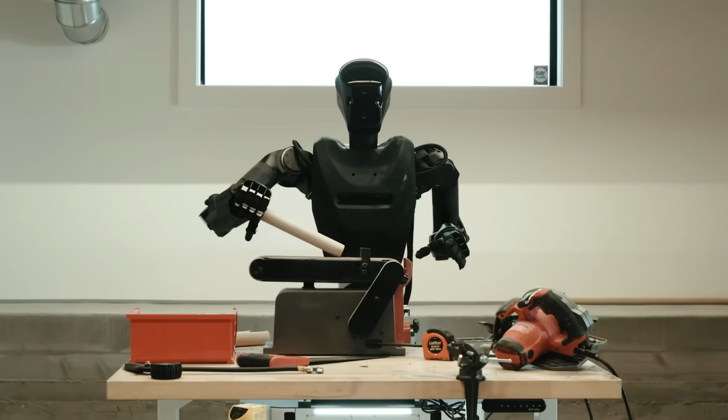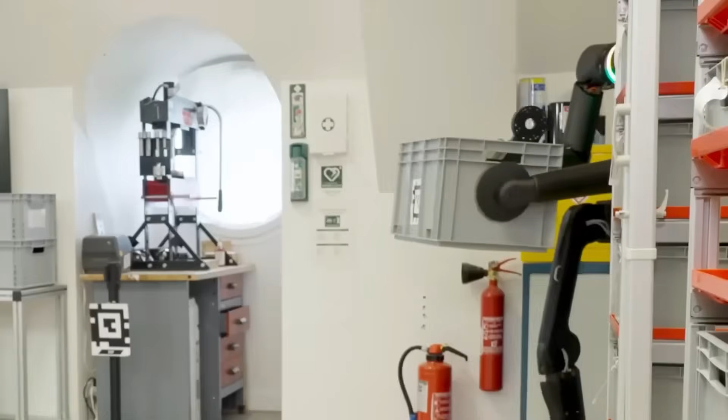Foundation Robotics is officially going full humanoid. Wheeled robots are out, and legged robots are the entire future. And if that wasn't enough to shake up the robotics world, Wandercraft just locked in $75 million to go absolutely massive with their AI-powered exoskeletons and humanoid robots.

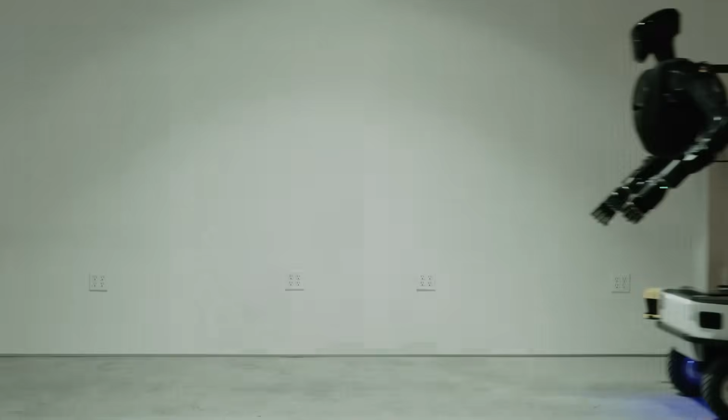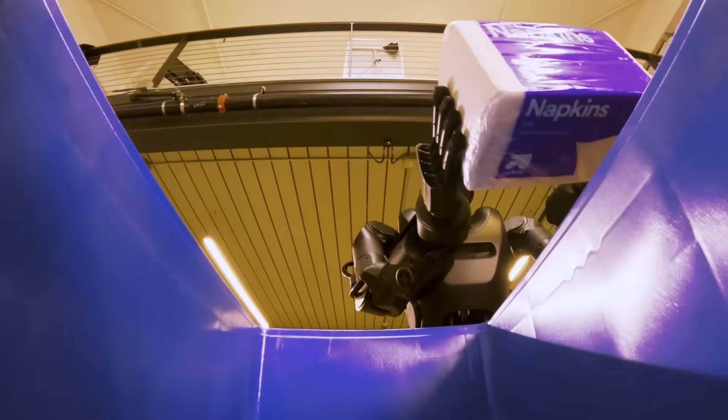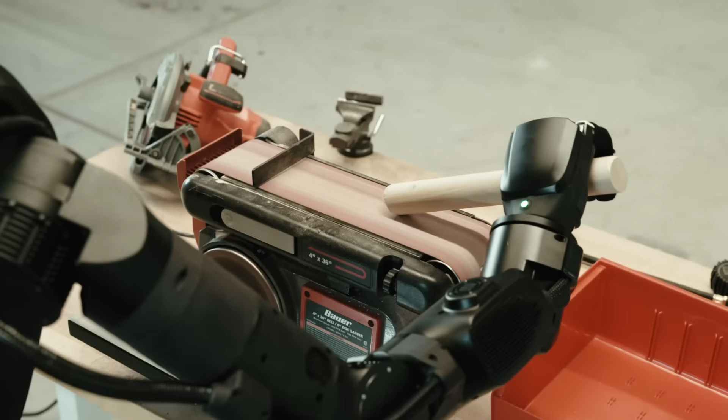Let's start with Foundation Robotics, because their pivot is one of the most decisive moves we've seen from any robotics company in the last year. Just a month ago, they shipped out their very first production robot, the Phantom, to a real customer. That robot had wheels, was built for real-world factory work, and marked the company's first step into commercial deployment. But now, Foundation just dropped new footage showing Phantom operating in that customer's facility, and in the same breath, they made it clear: they're done with wheels.

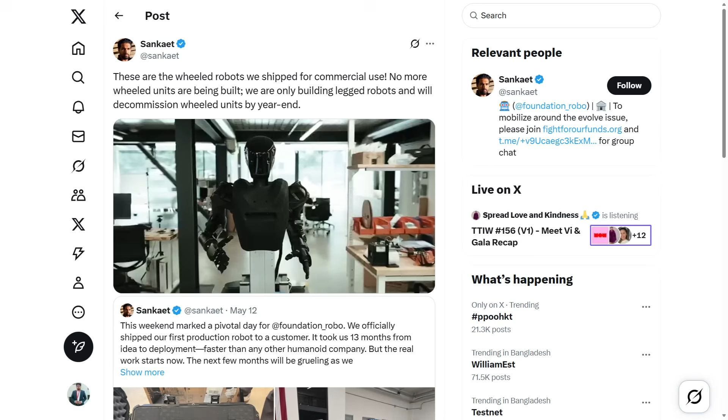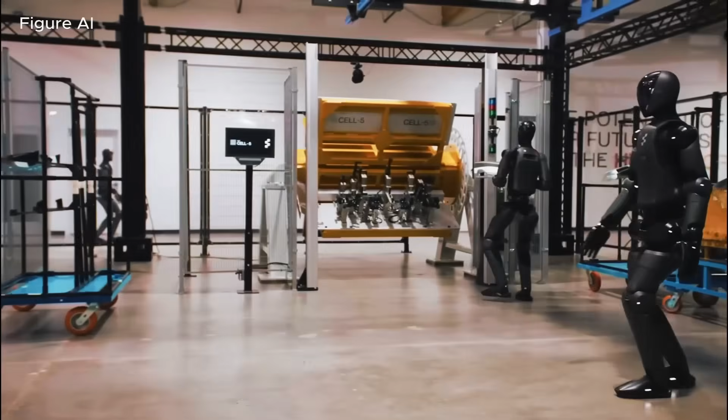Foundation is officially ending production of their wheeled robots and will phase them out entirely by the end of the year. That's a bold statement, because a robot company finally gets a product to market, lands their first customer, and instead of doubling down, they pull a 180. Why? Because they believe the future isn't wheeled, it's legged, it's humanoid. Bipedal machines that can navigate the same spaces we do without needing ramps, flat surfaces, or any special accommodations. Now, Foundation isn't exactly abandoning what they've built so far.

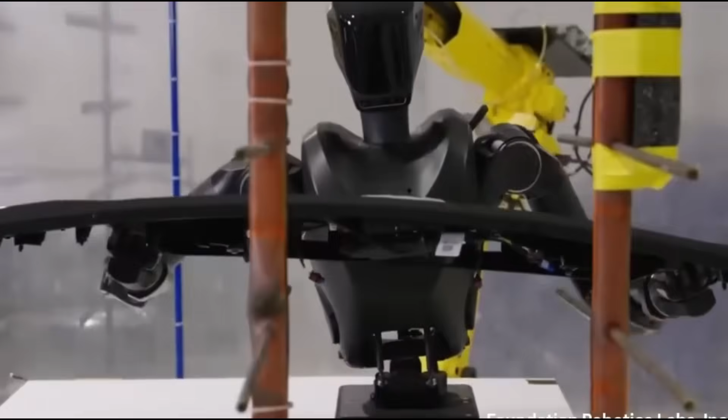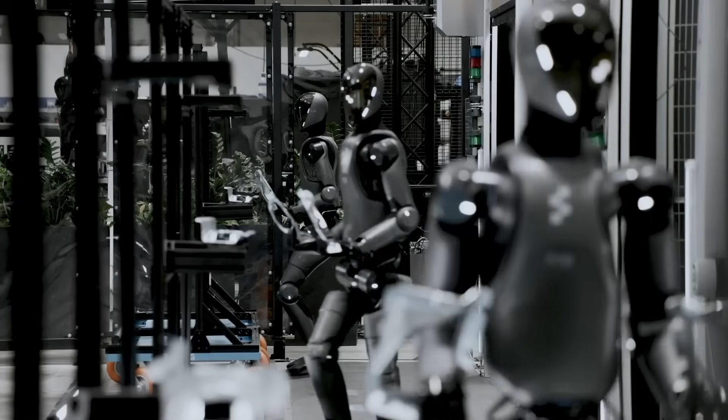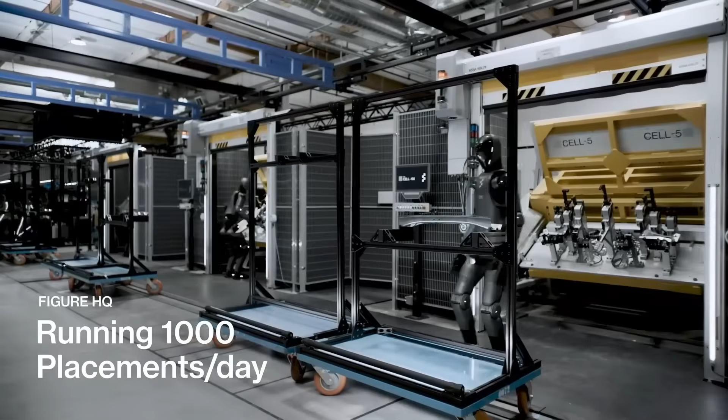That customer deployment was still a huge success. The Phantom showed real capability. But Foundation is looking at the bigger picture. They know that to build robots that can work in truly human environments, in warehouses, factories, homes, or offices, you need legs. You need humanoid systems that can handle stairs, thresholds, tight corridors, and unexpected clutter. You need machines that walk like us, see like us, and move with enough fluidity to be genuinely useful alongside people. And that's where their new focus lies.

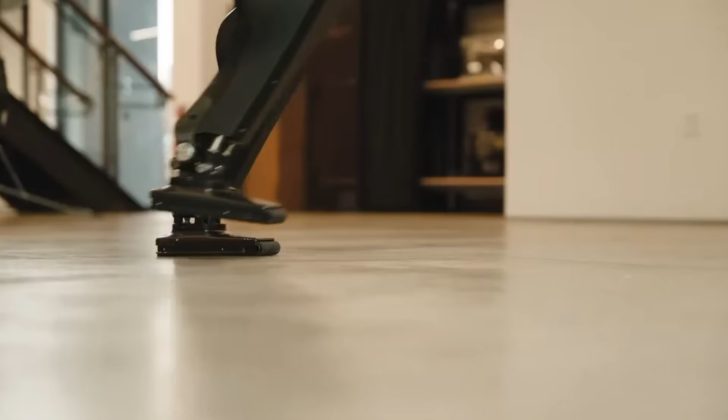This shift isn't coming out of nowhere. Foundation Robotics has been working behind the scenes on legged mobility for some time. They've hinted at prototypes, internal testing, and design overhauls. But this is the first time they've put a clear stake in the ground: wheeled units phased out, entire focus on legged humanoid robots.

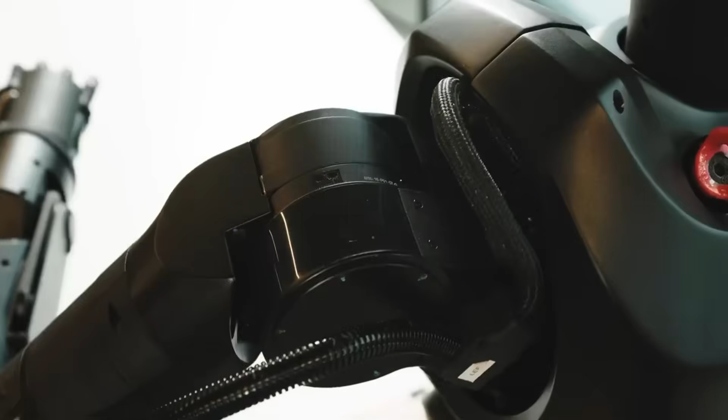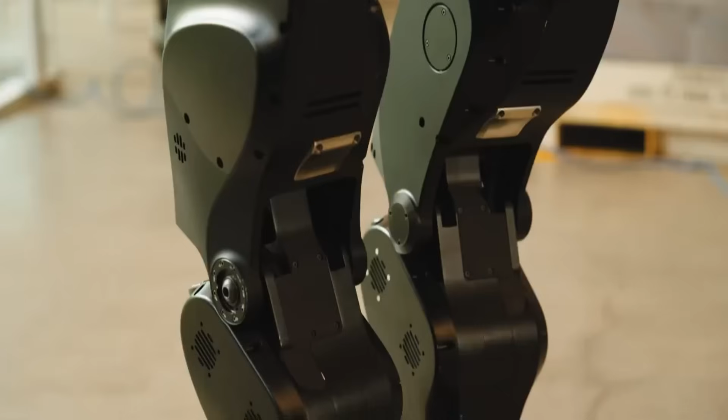That puts Foundation squarely in the race with some of the biggest names in robotics today: Figure, Tesla, Agility, 1X, Apptronik. But what makes Foundation's move unique is that they're not just talking, they're executing in real time. One month, production robot shipped. One month later, full strategic pivot, footage of robots in action, and a total commitment to the humanoid vision. It's a sign of how fast this industry is moving, and how quickly companies have to adapt if they want to stay relevant.

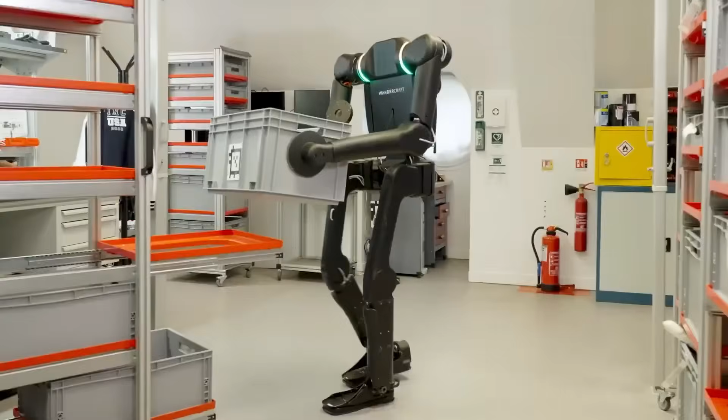Now, pivot over to Wandercraft, and the story gets even bigger. If you've been following the robotics space, you've probably heard their name before. They're the Paris-based company known for building some of the most advanced robotic exoskeletons in the world, machines designed not just to assist movement, but to restore it entirely for people with mobility impairments.

And they just raised a whopping $75 million in Series D funding. Let that number sink in. $75 million, that's not seed money, that's not an experimental grant. That's serious capital from major backers, including Renault Group, Bpifrance, and the European Investment Bank. These aren't just tech dreamers, these are industrial, economic, and governmental powerhouses placing big bets on Wandercraft's vision.

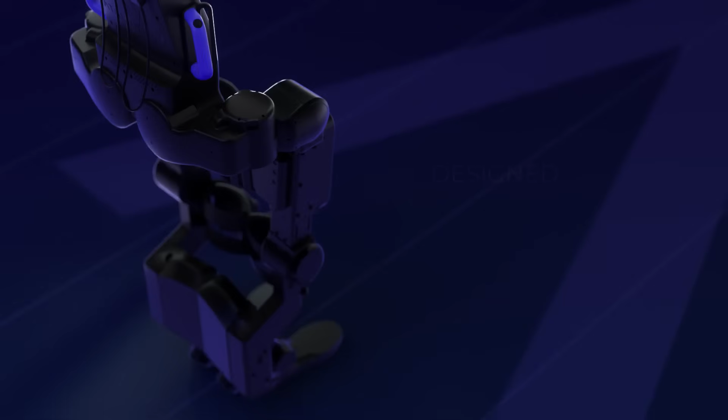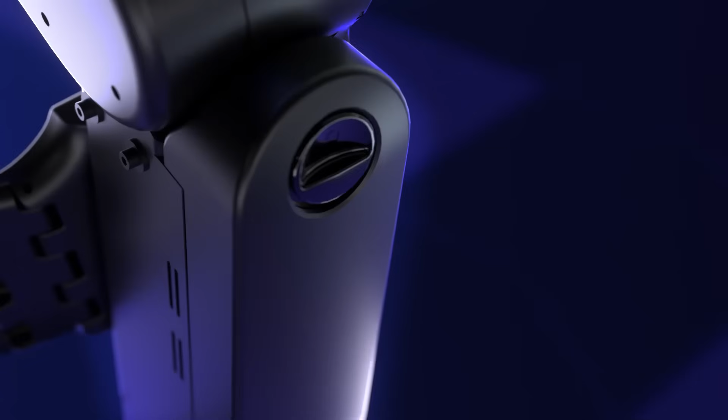So, what's the money for? First up, Wandercraft is launching something that could totally redefine assistive robotics: a personal-use, self-balancing exoskeleton called Eve. That name's not random, it's the first of its kind. Until now, most exoskeletons required crutches or support. But Eve? It balances itself, it walks on its own, and it's built for real people to use in real life, outside of hospitals and labs.

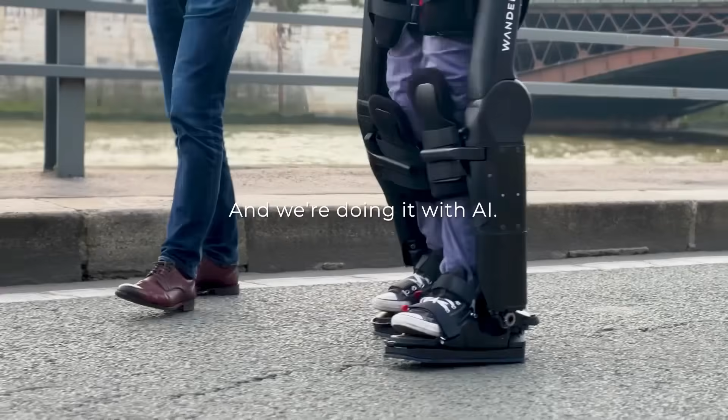They're aiming to launch it by 2026, and when they do, it could change everything for people with spinal cord injuries, neuromuscular disorders, or stroke-related mobility loss. This isn't just a medical device, it's a wearable robot that gives people their independence back. And Eve is just the beginning. Wandercraft is also pushing to expand clinical use of their existing Atalante X platform, a robotic walking system that's already being used in rehabilitation centers across Europe and the US. This device doesn't just assist movement.

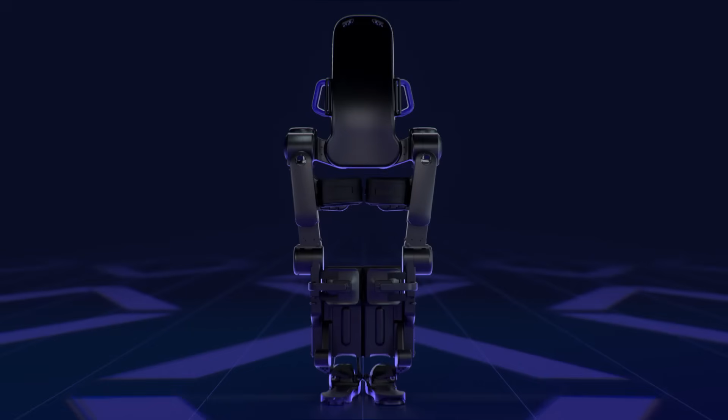It trains the user, simulates natural gait patterns, and offers real-time feedback. It's powered by AI, deeply customizable, and now, thanks to this funding, it's poised to scale like never before.

But here's where it gets even more exciting. With all the attention on exoskeletons, Wandercraft is now also stepping directly into the humanoid robot arena. They're developing a fully autonomous humanoid robot called the Calvin 40. And this isn't some distant concept or pie-in-the-sky vision. It's already in the works.

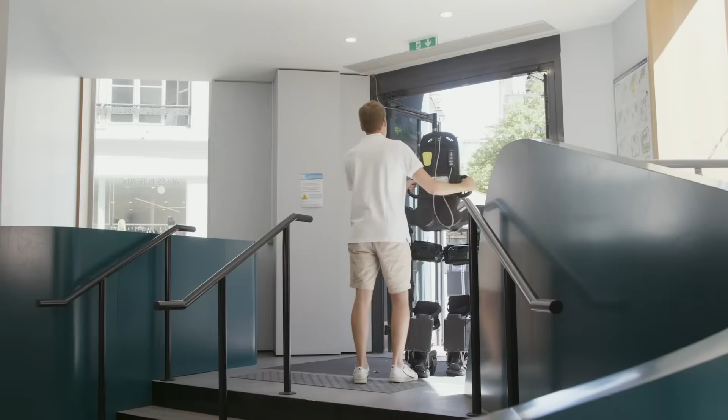Calvin 40 is designed with Wandercraft's deep biomechanical expertise baked in. Their exoskeletons already simulate human walking with uncanny precision. Now they're taking that same tech and applying it to a fully robotic system that can walk, balance, and eventually perform useful tasks in human spaces.

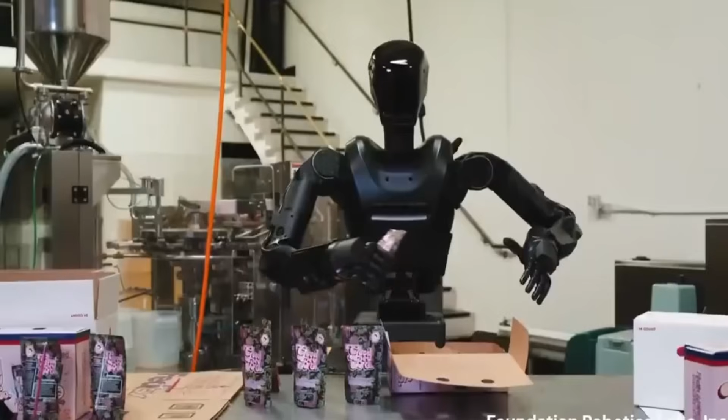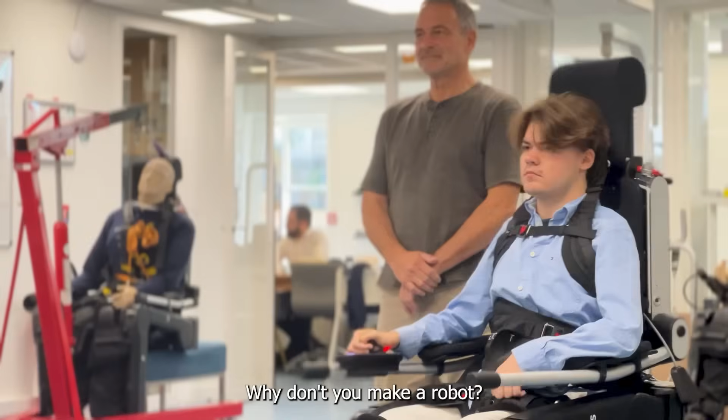So on one side, you've got Foundation Robotics going full humanoid and ending wheeled robot production entirely. On the other, Wandercraft is not only building life-changing exoskeletons, but stepping into humanoids with a war chest of fresh funding and institutional backing. And when you look at both companies side by side, a bigger picture starts to emerge. This is the era of convergence.

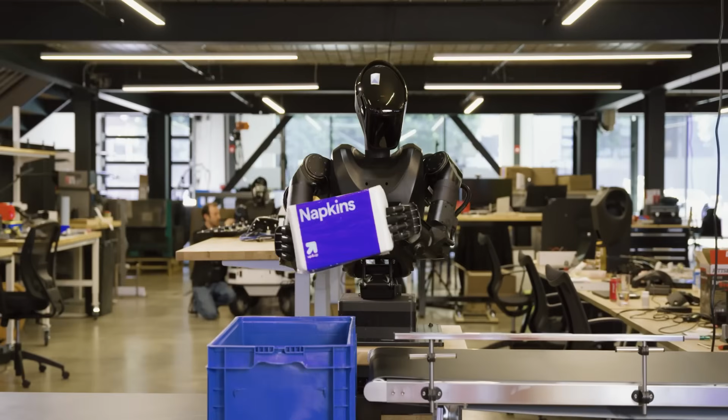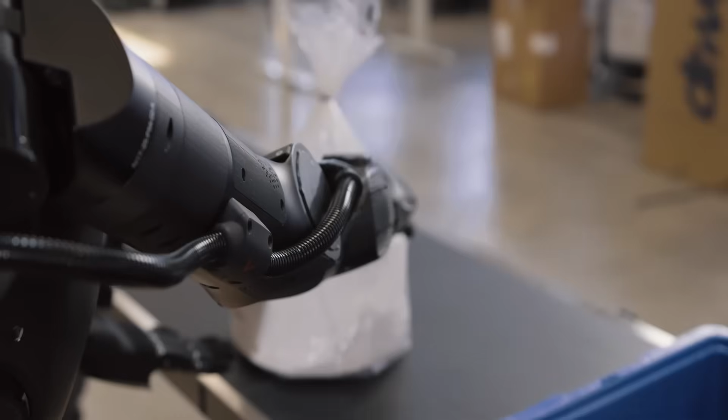We're seeing the lines blur between assistive robotics, industrial automation, and general-purpose humanoids. It's not just about robots doing factory work anymore. It's about embodied intelligence, AI systems that can move through the world the way humans do, with balance, adaptability, and awareness. Foundation and Wandercraft represent two ends of that spectrum.

One started in industrial applications and is moving toward general-purpose humanoids. The other started in assistive tech and is evolving into full-bodied robotic systems. And they're both powered by the same fundamental shift: AI.

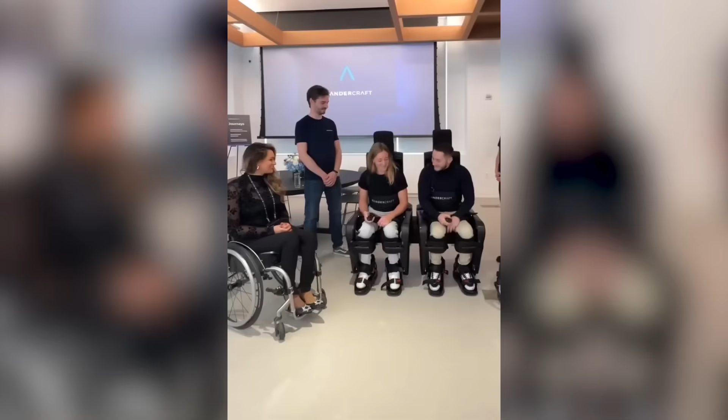Think about how foundational this is. Foundation Robotics is ditching rule-based robotics in favor of AI-native systems. Wandercraft is training intelligent gait engines using real-world movement data. Both companies are leveraging machine learning not just to guide robots, but to define their behaviors from the ground up.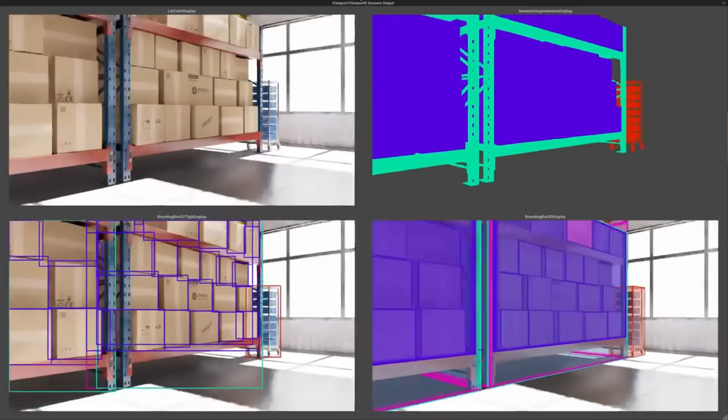This isn't about pre-programming a robot with specific motions. It's about giving it the tools to learn from the environment, adjust in real time, and execute complex behaviors fluidly. That's the leap. That's what makes these robots different from the clunky machines of the past.

Let's put this into context. For years, robots have been confined to highly structured environments: assembly lines, controlled labs, repetitive tasks. Why? Because they couldn't deal with change.

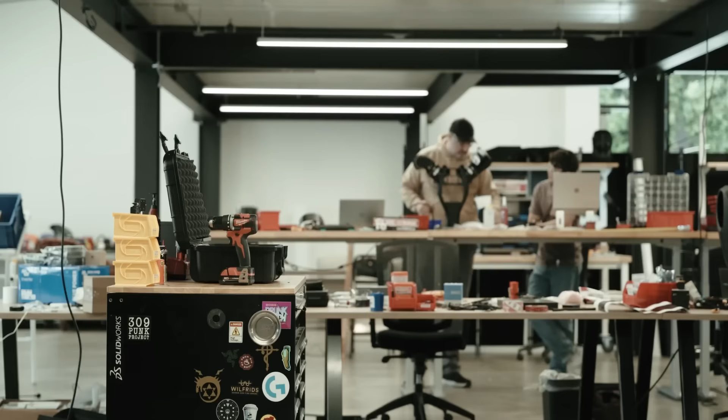But humans don't live in structured environments. We deal with uncertainty, imbalance, complexity. That's why humanoid robots have always seemed like science fiction. They require an entirely different level of perception, control, and intelligence.

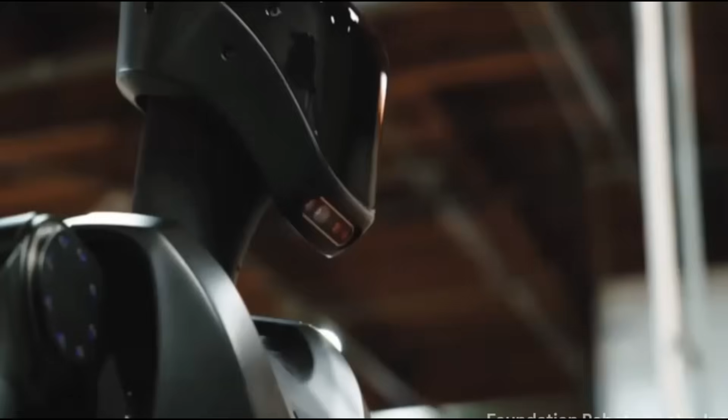But now, companies like Foundation and Wandercraft are cracking that code. And it's not just about walking. It's about integrating vision, planning, and motion into a seamless feedback loop. It's about learning from experience. It's about adapting on the fly. These are capabilities that used to be the domain of animals, and now, increasingly, they're being embedded into machines.

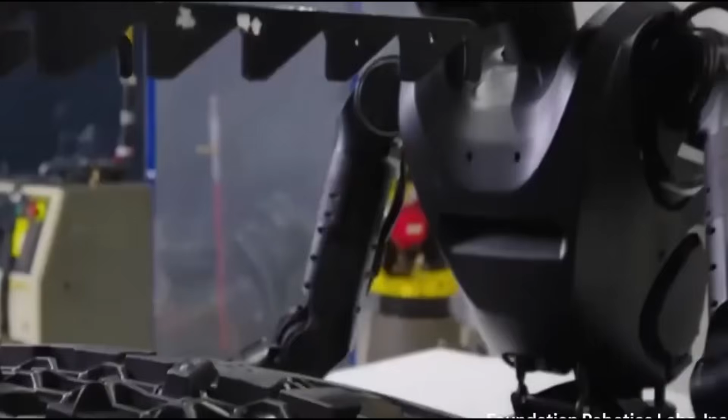Now, here's the thing. This shift isn't just technical, it's strategic. Both companies are positioning themselves for the long game. Foundation is making a clean break from legacy systems to focus entirely on future-ready designs. Wandercraft is building a product pipeline that serves clinical, personal, and industrial markets simultaneously.

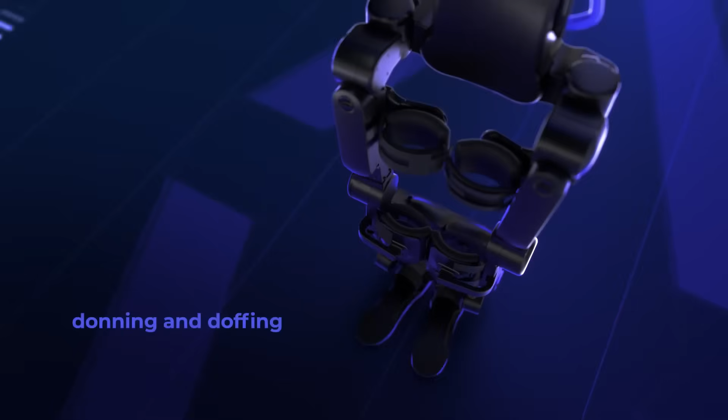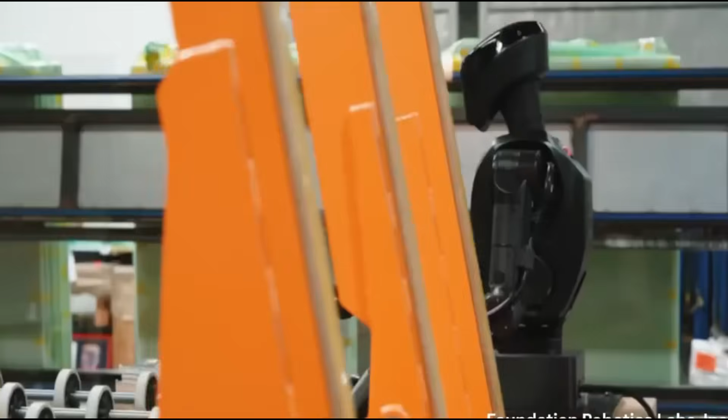And because they're building intelligent, software-defined robots, they can iterate fast. They can deploy updates, refine behaviors, and scale their platforms in ways that weren't possible before. That agility is going to be critical as demand for real-world robotics continues to explode.

We're not just talking about helping people walk again or replacing warehouse workers. We're talking about a complete rethinking of how physical labor, mobility, and embodied intelligence are handled in society. And here's what makes it even more compelling. The economics are finally lining up.

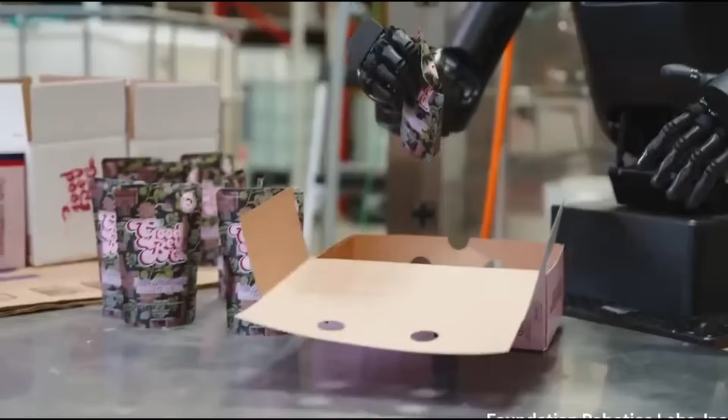For years, humanoid robots were dismissed as too expensive, too unreliable, or too gimmicky. But now, with breakthroughs in AI, better hardware, and smarter designs, the cost curves are bending. Just like smartphones, drones, and electric vehicles, the tech is reaching an inflection point. One where scale becomes not only possible, but inevitable.

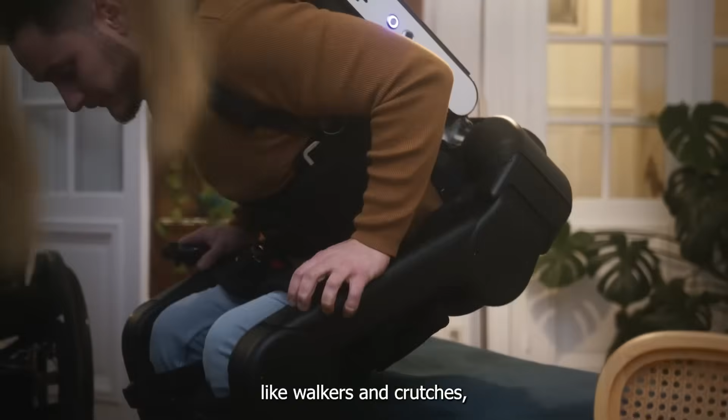Companies like Figure have already talked about driving costs down 90%. Now Wandercraft is building high-impact devices that could be affordable for hospitals and individuals. And Foundation's Pivot signals they're ready to compete on both performance and price. We're at the beginning of a robotics arms race. But this time, it's about who can make the most useful, scalable, intelligent, and human-ready machines.

So what happens next? If you're a robotics company right now, you have two choices: either adapt to the humanoid revolution or get left behind. The bar has been raised. AI-native design isn't optional. Legged mobility isn't niche. These are becoming table stakes for anyone who wants to play in the future of embodied AI.

If you're a developer, researcher, or engineer, now is the moment to get involved. This isn't a future arriving slowly, it's accelerating, with real funding, real deployment, and real-world results happening right now. Foundation and Wandercraft aren't just participating in that acceleration, they're helping to lead it. Keep your eyes on these companies and watch how quickly they move, because if the past few months are any indication, the next wave of updates could completely change the game again. AI robots aren't just evolving, they're transforming fast, and if you're wondering where the next leap is coming from, you're probably already looking at it.

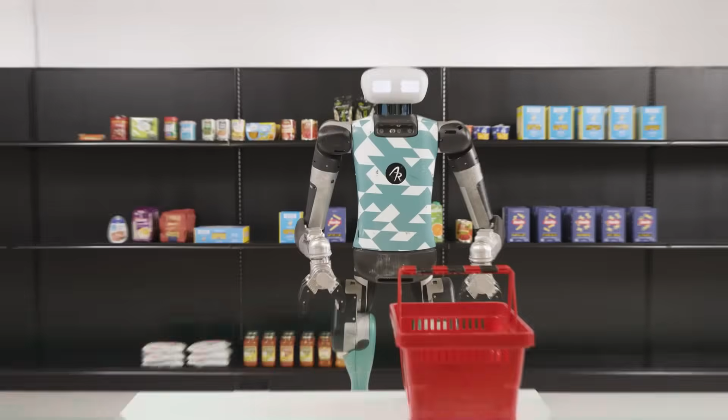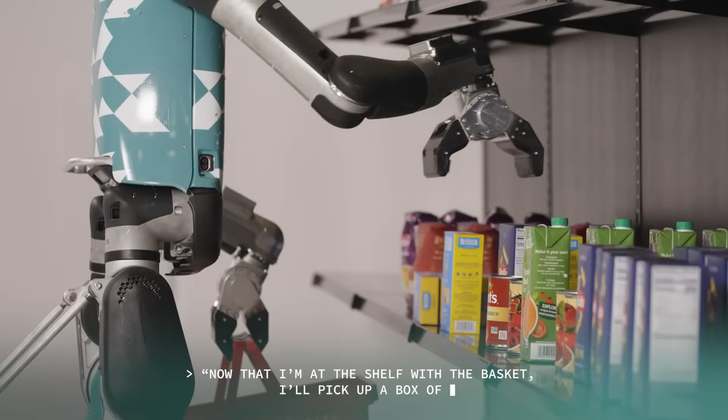If you think that was impressive, buckle up, because what Digit from Agility Robotics pulled off might just redefine what we expect from humanoids. Their humanoid robot, Digit, didn't just walk or carry something around. It listened to a natural language request, figured out what it meant, decided which ingredients were needed, searched the environment, and collected the items all on its own. This wasn't a controlled lab test. It was a real-world scenario that required understanding, reasoning, navigation, and physical manipulation, the kind of things humans do effortlessly and robots have struggled with for decades, until now.

Seven words, that's all it took. A person said, 'Bring me the ingredients to make pasta,' and the robot moved. No buttons pressed, no joystick, no technician in the back. Just a human voice and a humanoid machine that understood exactly what to do. So let's unpack this, because what just happened isn't just a quirky robot trick. It's a glimpse into the near future of service robotics, a future where robots don't just follow instructions, they understand them.

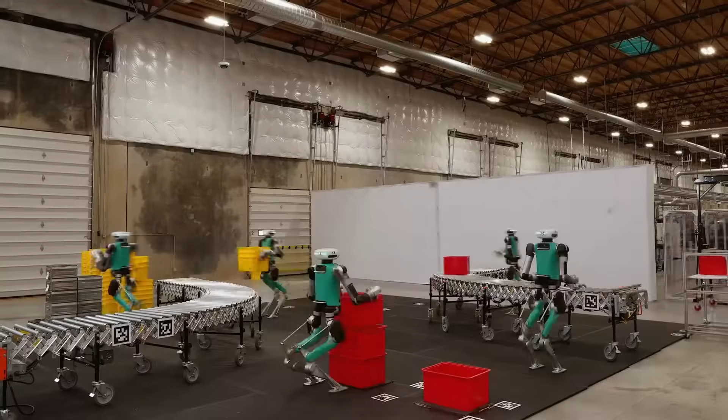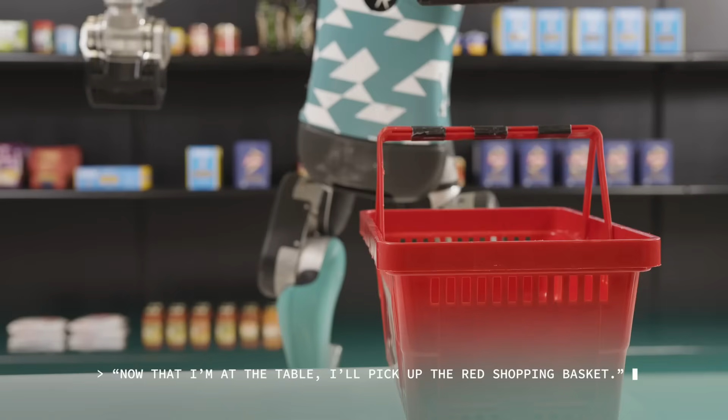First, let's talk about the robot itself. Digit has already made headlines in recent years for its elegant, bird-like walking gait, its role in logistics at Amazon, and its impressive balancing and recovery capabilities. But this new demonstration takes things to an entirely new level. This wasn't about stacking shelves or walking in circles, this was about context. When Digit heard, 'Bring me the ingredients to make pasta,' it had to understand what that meant.

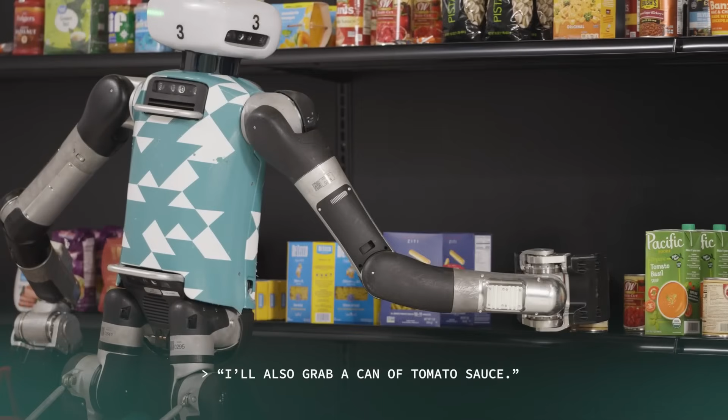And that's not as simple as it sounds. Unlike a traditional robot arm on an assembly line, Digit wasn't given a checklist. It had to interpret the goal, making pasta, and figure out what that entails. Think about what goes into that. First, Digit had to determine what ingredients are typically used to make pasta. Does that include dry pasta, sauce, garlic, olive oil, maybe some vegetables or cheese? That requires a knowledge base, a combination of pre-trained data, logical reasoning, and possibly even preference weighting based on the environment it's in. Digit had to identify what the request actually meant before it even moved a single step.

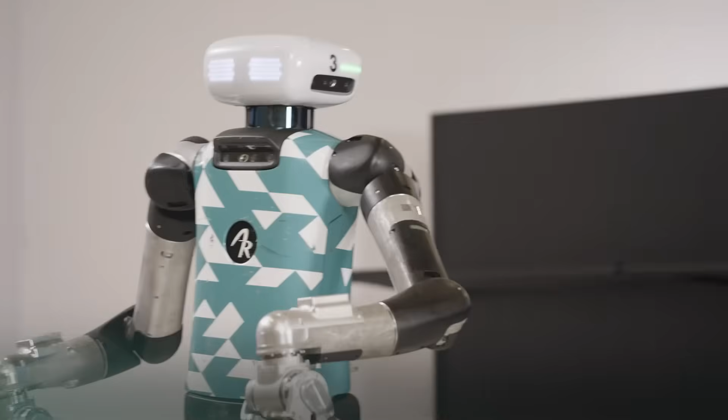Then came the hard part: execution. Once the robot understood the items it needed, it had to search for them. That means scanning its environment, identifying objects using computer vision, differentiating between similar items, and handling occlusion, meaning if something's partially hidden or facing the wrong way, Digit still had to figure it out. That's something that has traditionally tripped up even the best robots in the lab.

And it wasn't operating in a sterile, fixed environment. This was not a demo in a lab with neatly placed markers or labeled items. It was a naturalistic setting. Just like you or I might navigate a kitchen or grocery aisle, Digit had to make decisions in real time. Do I go left or right? Is that spaghetti or fettuccine? Can I carry this item while also grabbing the sauce?

It even had to coordinate its physical body. Digit doesn't have hands like a human, it has uniquely designed arms with simplified grippers, optimized for stability and utility, not delicate manipulation. So every item it picked up required some decision-making on how to grasp, lift, and balance it while continuing to walk. And keep in mind, Digit walks bipedally, that means balance and locomotion are already complex on their own, even without carrying things.

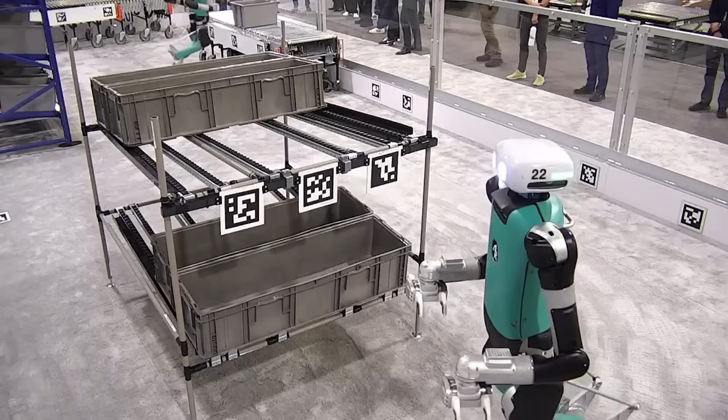Now here's where it gets even more interesting. This wasn't a single hard-coded routine, the entire point of the demonstration was to show generalization. Digit wasn't told exactly which items to grab or where to go, it used onboard intelligence and perception to decide. And the language command it received wasn't robotic either, it was natural language, just like someone might ask a roommate or an assistant. That's a massive leap in how humans and robots can interact. Up until recently, if you wanted a robot to do anything, you had to be specific, you'd have to program exact coordinates, define the object parameters, create a rigid script. But now we're seeing a turning point.

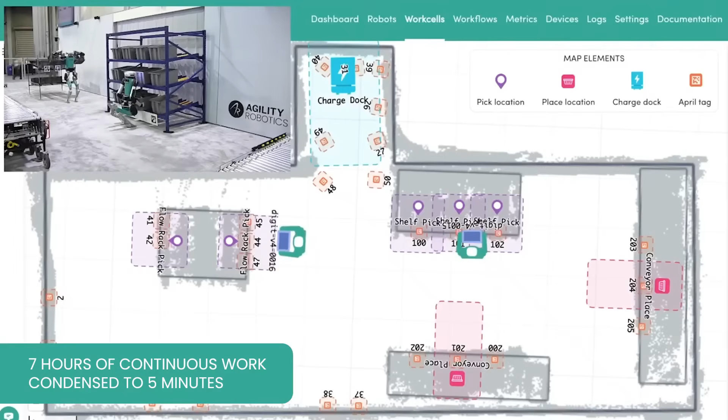Robots like Digit are being trained to understand intent, not just instructions. They're beginning to reason, to plan, to decide. This kind of capability is made possible by the fusion of physical robotics with advanced AI models. Natural language processing, scene understanding, motion planning, and visual recognition all have to work together in real time. It's like giving a robot a brain, a nervous system, and a pair of legs, all controlled by something that's learning to think.

That's why this moment matters. It's not just that Digit did something cool. It's that the task it performed required dozens of different skills to come together in harmony. It had to listen, reason, move, manipulate, adapt, and respond, all in response to a very human request. That's not a stunt. That's intelligence.

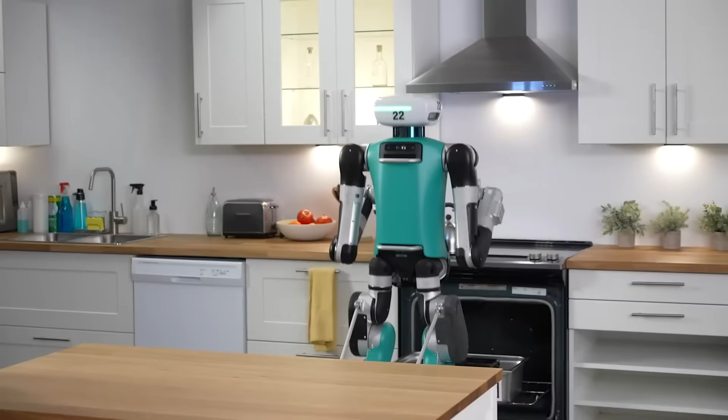Now, let's think bigger. If a robot can take a vague request like, "Bring me the ingredients for pasta," and turn it into a series of successful physical actions, then we're looking at a future where robots can be genuinely helpful. Not just in factories, but in homes, stores, restaurants, hospitals, and public spaces.

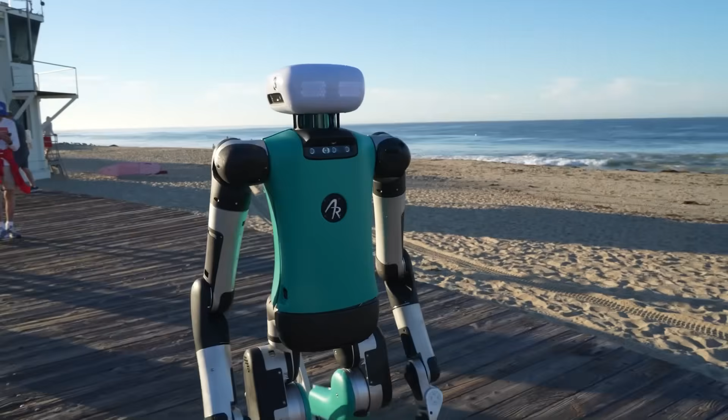Picture a world where humanoid robots assist elderly individuals in their homes. They don't need to be told every detail. You could say, "I want to make a salad," and the robot would fetch the ingredients from the fridge. Or in a retail setting, you could tell the robot, "Help this customer find a red jacket," and it would understand not just the words, but the intent, guiding, assisting, even engaging in conversation if needed.

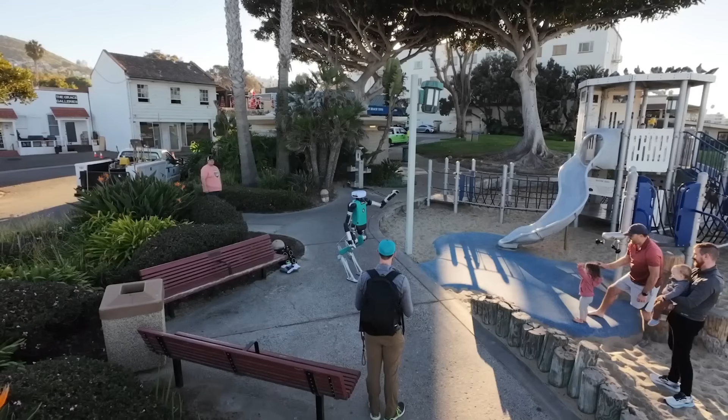Agility Robotics is clearly thinking in this direction. Their design philosophy for Digit has always emphasized human-centric environments. In other words, they're not trying to redesign the world for robots. They're designing robots that can navigate our world the way it already is. That's a huge shift from the traditional robotics model where environments are tightly controlled.

By equipping Digit with natural language capabilities and autonomous navigation, they're showing what's possible when machines begin to understand human goals in the way we naturally express them. That's what sets this demonstration apart.

There's also something psychologically powerful about it. Watching a humanoid robot respond to your voice, turn its head, walk across the room, and return with something you asked for, it taps into something primal. It's the same feeling that science fiction has teased for decades. The dream of a mechanical assistant that understands you. Not just follows commands, but understands you.

And yet, this isn't a far-off dream anymore. It's not just being imagined in books or movies. It's happening, right now, today.

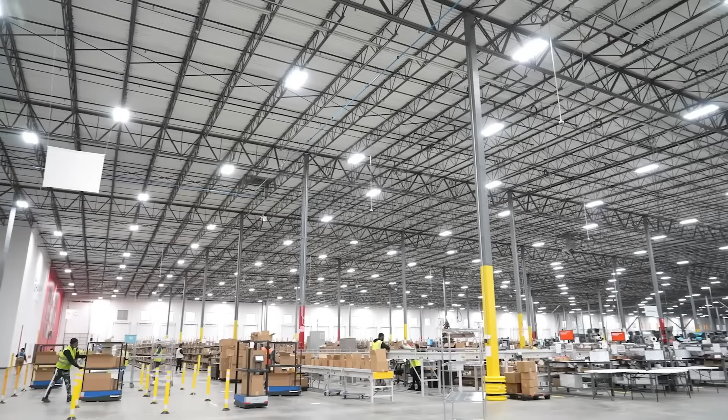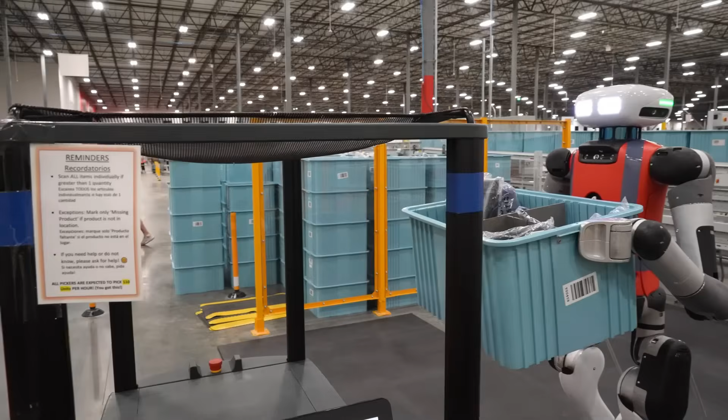But let's be real for a moment. There are still limitations. Digit isn't as fast as a human. It's not going to win a race against a warehouse worker. Its hands are still relatively basic. It's not going to julienne carrots or open a jar of sauce anytime soon. But none of that takes away from what it can do. Because autonomy, real autonomy, is harder than anyone outside the field realizes. And what we just saw was a working example of it.

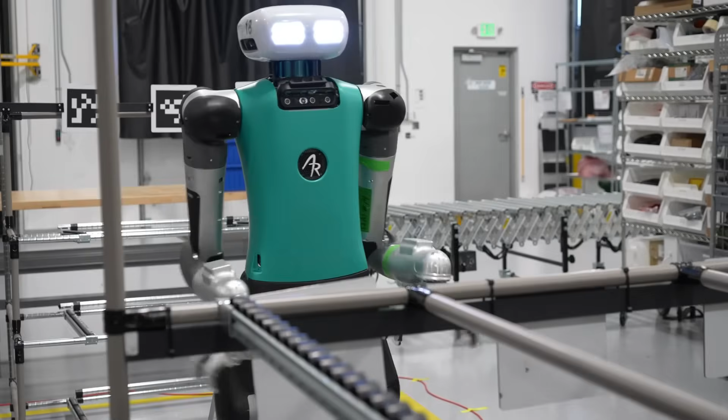The next logical step is scale. Right now, this kind of demo is still carefully staged, even if it's real world. But imagine what happens when these capabilities get rolled out to multiple robots in multiple locations, performing various tasks for real customers. That's where things get exponential.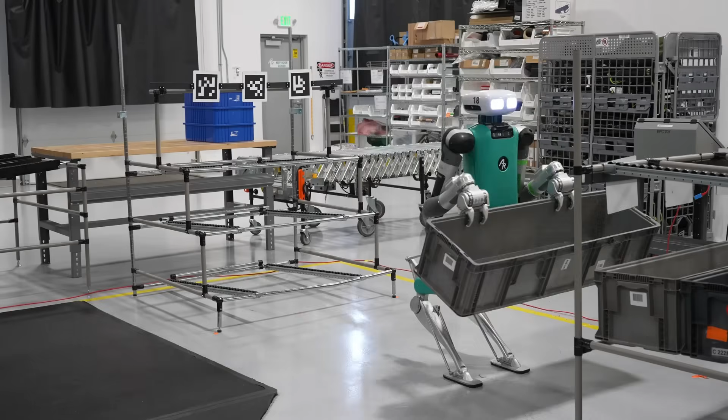Agility Robotics already has plans to deploy Digit at scale, especially in logistics and retail. But this kind of demo opens up entirely new categories: smart kitchens, home robotics, elder care, customer service. The technology behind this could be licensed, adapted, and expanded in ways we haven't even imagined yet.

There's also the matter of safety, and Digit's design addresses that head-on. Unlike some industrial bots, Digit is lightweight, has a soft exterior, and is meant to coexist with people. Its movements are deliberate and non-threatening. It's not there to replace human interaction. It's there to enhance it.

And here's something else worth considering. If a humanoid robot can understand language, navigate unpredictably arranged environments, and solve physical problems in real time, then we are entering a period where robotics isn't just catching up with humans. It's complementing us. You don't have to train for hours to teach a robot how to help you. You just speak. The same way you'd speak to a colleague or a friend or a family member.

So the next time someone says robots are still decades away from being truly helpful, point them to this moment. To Digit, to that simple phrase, "Bring me the ingredients to make pasta," and to what happened next. Because what we just witnessed isn't just a step forward. It's a signal that the age of intelligent humanoid helpers isn't coming. It's already knocking on the door.